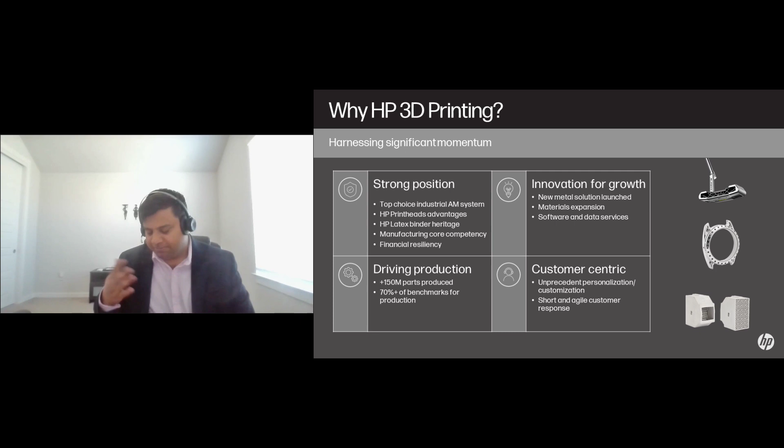Thank you, Sharon. Thank you all for those who attend the session. Really appreciate your time and effort. It's going to be one good session for who wants to know more about tooling from INDO-MIM and talk about real world experiences. I know you came here today to know more about molding tooling and its benefits and how binder jetting is enabling that.

But let me take a step back, and for those who are not familiar with what is binder jetting, what is HP doing here? Let me take a few minutes to go through this process, then I will hand it over to Jag, where the real stuff comes in.

So let's start today by discussing why HP is uniquely positioned in this ever-changing, dynamic 3D printing industry. Today, HP offers a top choice industrial manufacturing solutions, especially in additive, both for plastics and metals, with several key advantages to customers ranging from research, small and large manufacturers.

Our proprietary HP printheads and latex binder technologies gives us a significant edge that provides the key advantages to customers. In addition to our proprietary technology, we are backed by strong manufacturing core and finance resilience, which is very important today in the additive manufacturing industries.

Don't take our words for this, but if you look at it, how many production milestones we have achieved with our partners, our customers out in the field, we have produced over 150 million parts. Our partners have produced 150 million parts using HP's technology, which is setting a benchmark for industrial applications and scalability. We are not happy with that. We want to continue to drive our innovation, so that more and more people use additive manufacturing and see it as more than a prototyping technology.

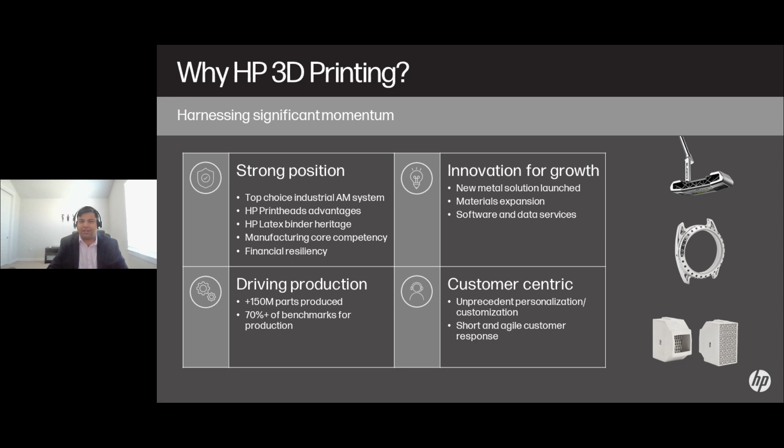With that, we launched a Metal Jet solution, which is specific for printing metal parts at scale and expanding materials both on our polymers and metal front, and advancing the software and data services to support our customers. Finally, all this is possible because of our customer-centric approach, where we listen to customers, where we deliver high levels of personalization depending on the requirements, and finally rapid response times, which are very, very essential in today's dynamic market, especially for metal binder jetting, as you can see.

So here we have our HP Metal Jet solution, which is a versatile, scalable metal 3D printing platform designed for research, small and large manufacturers use. Use the same system to develop a material, to develop the application, and you can scale it for making 1,000 parts, 10,000 parts, 20,000 parts, depending on your designs.

It includes modular components for a powder management system where you load the powder before going into printing, and you do printing, curing, and powder removal. Each of this equipment is optimized for efficiency and high quality production.

This modularity not only streamlines workflows, but also enables scalability, making it ideal for research, small and large production environments. What that means is you don't need to have 10 SKUs to address 10 different customers. You may need to have only one SKU where it meets all the customers. And as you advance in the technology, advance in the application development, you can use the same platform.

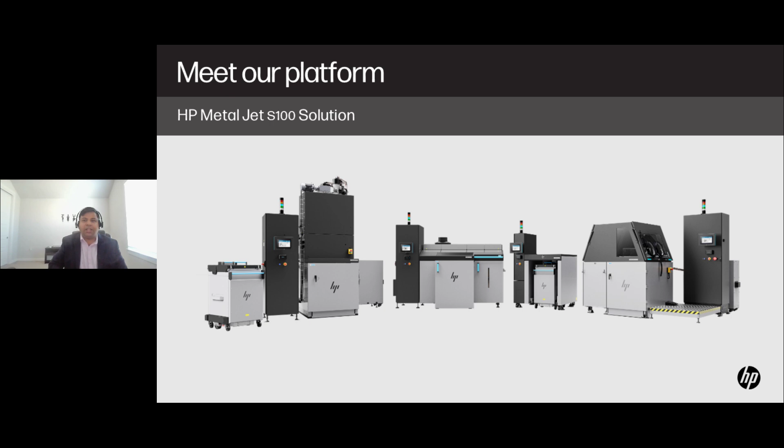HP's Metal Jet S100 delivers superior production quality and economics, overcoming traditional limitations in additive manufacturing for mass production. This is all possible because we take it very seriously, and it's very significant within HP, where we want to combine reliability, repeatability, and process economics to deliver high quality parts to our customers and install base.

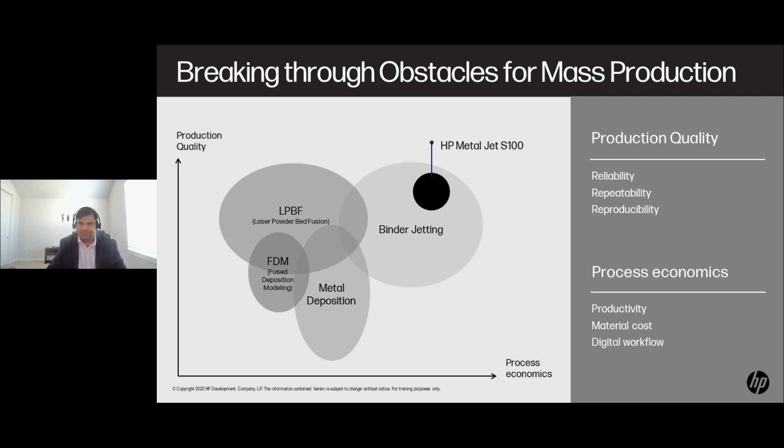In the powder management station, when you look at the screen, you find an HP Metal Jet build unit. If you're a big fan of Star Wars, think of it as an R2-D2 robot, which moves from one station or equipment to another. This build unit has 3 boxes.

The farther end box is where you put your loose metal powder, which is spherical in shape, sub 22 microns, used for building the parts. The center box is where you do the printing. You insert this build unit into the powder management station, which has an integrated sieve and automatically loads the powder into the farther boxes. Once it's done, you take it out and insert it into the printer.

In the printer, the farther end build box containing powder raises layer by layer, with each layer thickness varying from 30 microns up to 70 or even 90 microns, depending on your needs. A roller comes in and spreads a thin layer of powder. On top of it, a printhead deposits binder in selected locations—imagine it like printing on a piece of paper at home, except instead of paper, you're printing on a metal powder bed.

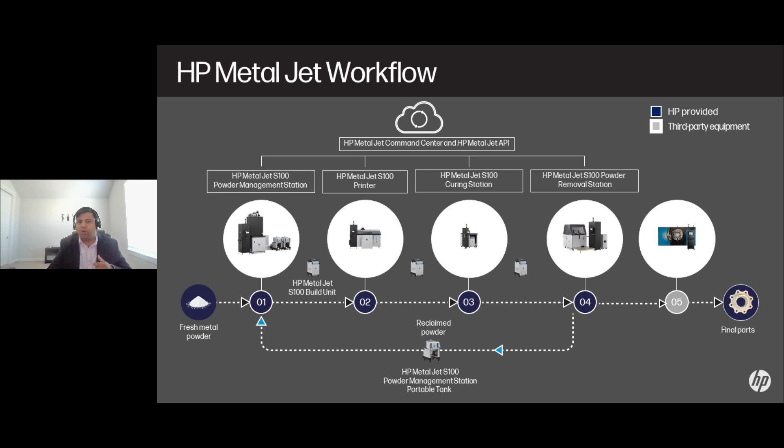This workflow ensures efficient, sustainable production, covering various types of equipment for seamless operations. Each step is designed to maximize productivity and minimize waste for an end customer, whether that's a research institution, a small manufacturer, or a large manufacturer like INDO-MIM.

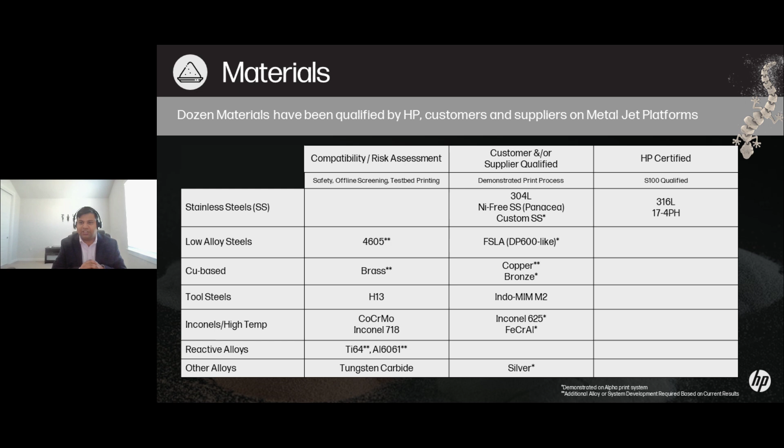Our equipment is mostly an open material system, where we support a diverse range of materials categorized into 3 steps. The farthest right is HP certified materials, meaning HP has gone through several rounds of testing and qualifying from powder lot to powder lot, printer to printer. The center section shows customer or supplier qualified materials, where INDO-MIM has qualified their M2 and 316L on our platform over the last 8 to 10 months, going through printing protocols specified by HP to demonstrate high quality standards. The farthest left column shows all materials HP has evaluated but waiting for the right customer demand and pull to move from left to right.

So finally, what makes us different? These numbers talk about operational efficiency, taken from our install base—not from HP, but from our complete install base. Operational efficiency is a priority for HP Metal Jet installations.

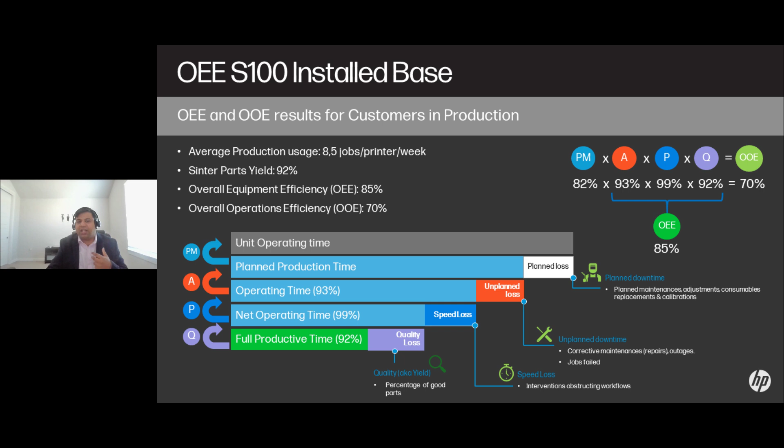Here you can see the key performance metrics: 85% overall equipment efficiency on our printers, printing on average 8.5 jobs per printer—not across all printers, per printer—with a yield of 92%. These metrics highlight what we want to deliver in the field: productivity, quality, and reliability to our customers, so they can put real application parts into production.

Finally, I'd like to take this chance to highlight our successful partnership with INDO-MIM, with 3 HP S100 solutions placed—2 in India, 1 in San Antonio, Texas, last year. INDO-MIM has been supporting multiple OEMs and qualified M2 and 316L powders for our platform, with more to follow. This partnership demonstrates how HP technologies enable large-scale production partners like INDO-MIM to support diverse manufacturing needs across different regions, and continues our collaboration in bringing out new materials and solutions to customers who haven't experienced additive manufacturing before.

With that, I would like to introduce Jag Hola from INDO-MIM, who is our continued champion and great partner. Jag.

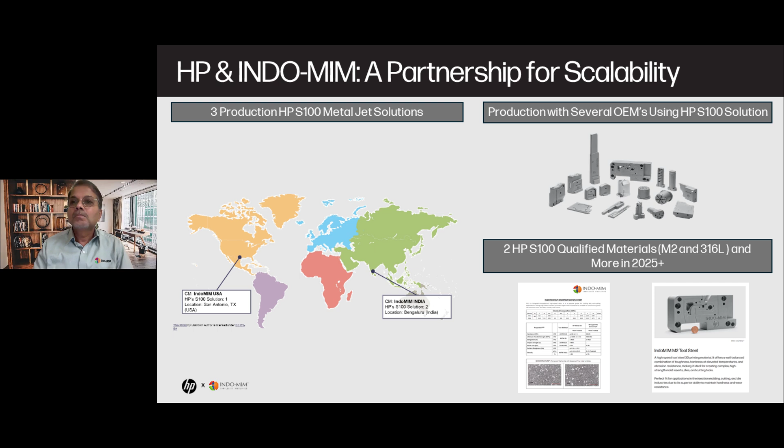Jag, I believe you're still on mute. There you go. Yeah, okay.

Good morning, good evening. Considering where you are calling from or attending the webinar, it's our pleasure today to share some of our experiences with binder jet 3D printing as applied to producing tool elements.

But before we dwell into more details, let me introduce INDO-MIM. I'm not able to move the—

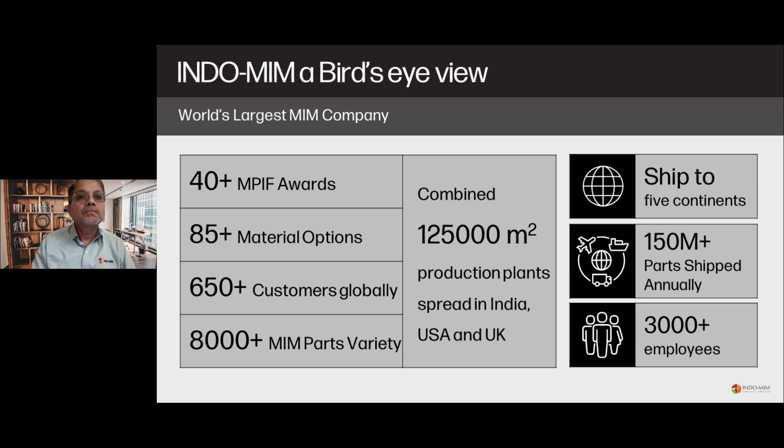Let me introduce INDO-MIM before we get into more details about the tool elements and how we adopted binder jet technology for producing the tool elements.

INDO-MIM primarily is a metal injection molding company. We are one of the largest in the world, and we have been in the MIM field for over 25 years. We ship to more than 5 continents, approximately 150 million parts per year. We have a production floor space of around 125,000 square meters. We service around 650 customers globally, and more than 8,000 MIM programs on an annual basis.

We also got involved with binder jet 3D printing since 2019, ever since the binder jet process started coming on the horizon. So we have probably accumulated one of the best experiences in binder jet technology, working with partners like HP for more than 4 to 5 years.

But what sets us apart also is we manufacture metal powder for additive manufacturing. Originally we started making these powders for our own captive requirement for the MIM process, but then we expanded our capabilities into 3 gas atomizers, where we currently produce powders for binder jet, LPBF, thermal spray, cold spray—pretty much anywhere metal powders are required, anywhere between 3 microns to 140 microns particle size distribution. We are in a position to make those powders.

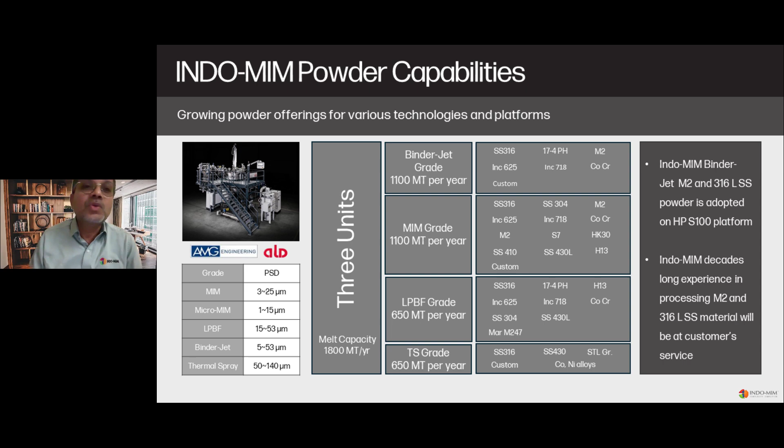Now let me also explain why we got interested in producing tool elements through 3D printing. Considering that we are a very large MIM company and service close to 10 to 12,000 MIM programs globally, and also launch around 300 new MIM programs every year, you can imagine the amount of tooling requirement that is required for running our business.

We have a very, very large tool room capable of producing close to around 900 MIM molds per year. Traditionally we have been doing production of the mold through conventional machining, which is a very acceptable process that most tool rooms in the world follow—basically machining it from bar stock. But this process definitely has got a lot of drawbacks.

As we are exposed to more and more newer technologies, we start seeing the drawbacks with the conventional method of working. The conventional production of tooling involves several machining steps, and it involves a large number of experienced tool makers that are very hard to find these days.

Conventional metal machining for producing tool elements doesn't give you a lot of design flexibility that 3D printing can give. About 10 to 12 years back, many tool rooms, including INDO-MIM, started adopting the 3D printing process. But before a couple of years back, we only had the option of printing tool elements using the LPBF process.

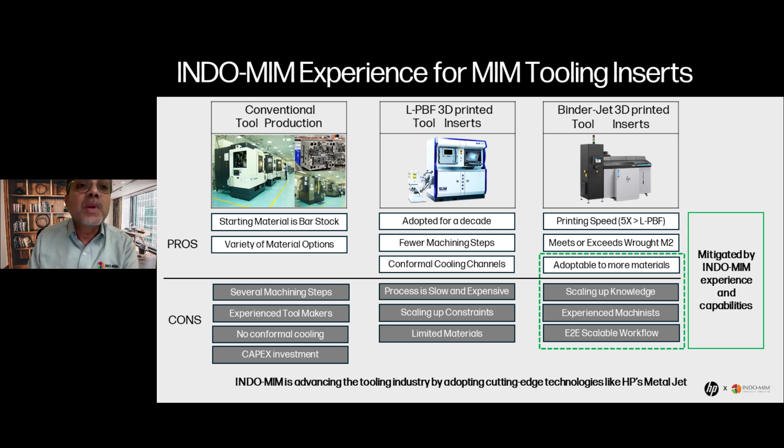That was one of the reasons why we really started putting a lot of energy into producing tool elements using binder jet for the tool elements.

Now let me quickly touch base on the benefits of binder jetting for tooling, which is very similar to all the advantages that industry has been enjoying for the last decade through laser bed fusion. So that's why I don't want to spend too much time, but we all know that binder jetting or 3D printing allows us to use conformal cooling technology, wherein you're now able to take the cooling channels very close to the molding surface, which means you're able to cool or heat the mold elements during the molding process more efficiently.

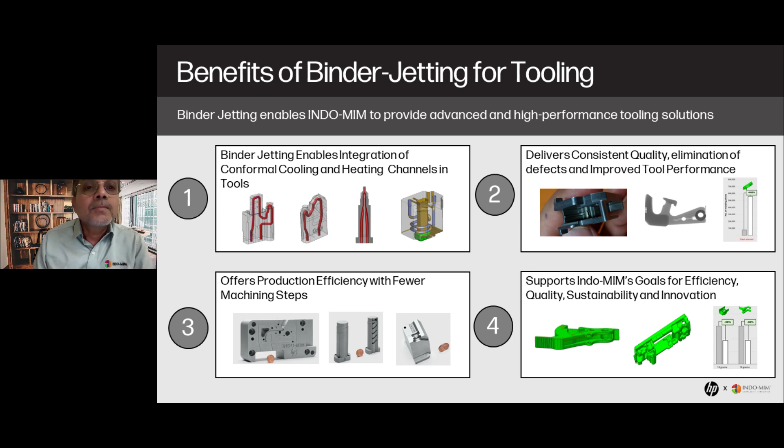These are some examples of the mold elements, just for your reference. We printed mold elements as small as 300 grams, but we also printed mold elements as heavy as 10 to 12 kilos. As you see here, some of this cavity, the mold cavity you see on the picture, they're easily around 8 to 10 kilos, which is quite surprising for the 3D printing industry, where normally LPBF, especially in the mid-level situation, you don't really print more than 4 or 5 kilos of material.

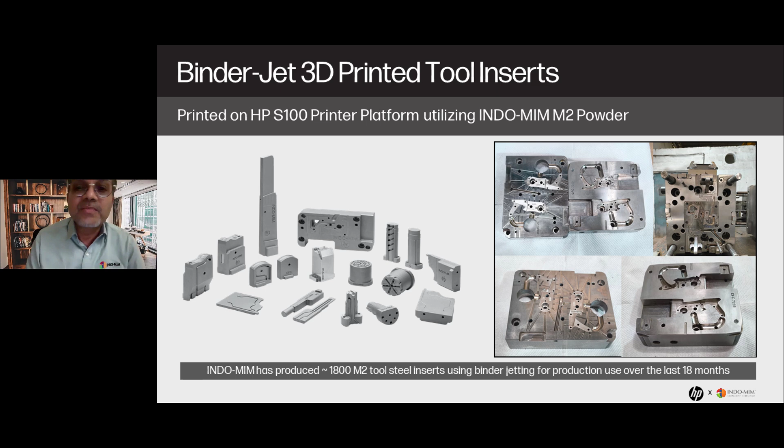Now coming to a real world example, I want to bring you up to speed on these examples taken from our operation, our tool room. How do we know that binder jet 3D printing is able to achieve the required success compared to the conventional method of manufacturing? So what we did was focus on a few key elements.

One of the key elements was, as we all know, in an injection molding process, it's important to have a uniform temperature on various elements of the mold so you can mold efficiently and cool the part efficiently. So we focused on the temperature study of various sections of the tooling on the 3D printed mold elements to see if there's any advantage. We also compared what kind of quality improvements we were able to achieve on the component using binder jet 3D printed mold elements. And obviously, we were also looking for cooling time reductions.

Are we able to reduce the cycle time from 40 seconds to 30 seconds, or 30 seconds to 25 seconds on a production basis, because now you are able to heat and cool the mold more quickly than we were doing earlier. And most importantly, we also focused on whether there is a real improvement in the mold life.

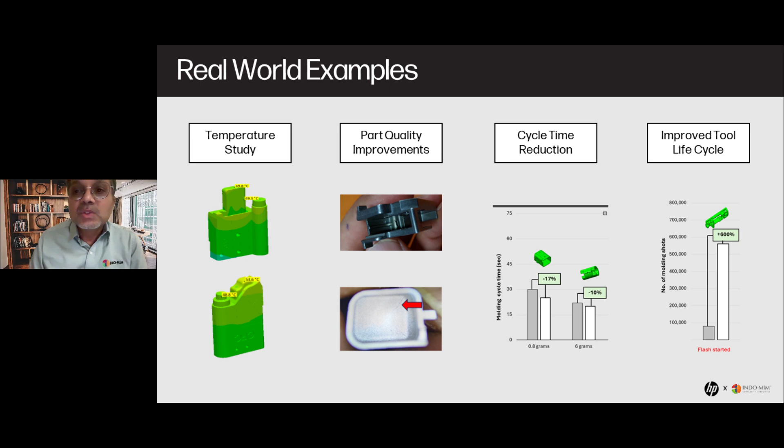When we switched over from wrought M2 to maraging steel laser bed fusion, we were very disappointed because the mold life actually dropped, as we were not able to get the required hardness on the laser bed printed tool elements. Now we are able to do M2 material with 63 to 66 HRC hardness, so we are hopeful we will get a very big improvement in tool life. So we focused on that as well, and I'm about to present some of those findings for your reference.

Starting with conformal cooling, how it really helped us maintain uniform temperature across the mold element, which helps both in cooling the component uniformly and molding it so the material does not freeze unduly in certain areas. If you look at the tool element, the conventional tool design only allowed a straight line, so the cooling was very inefficient. Because we adopted 3D printing, the conformal cooling tool design allowed us to take the cooling channel as close as possible to the molding surface.

The initial temperature, before we started molding, was obviously similar across all mold elements. But when we run 15, 20, 30 cycles, for lack of appropriate cooling, certain elements on the tool become significantly hotter than others, and that actually caused a lot of quality issues in the process.

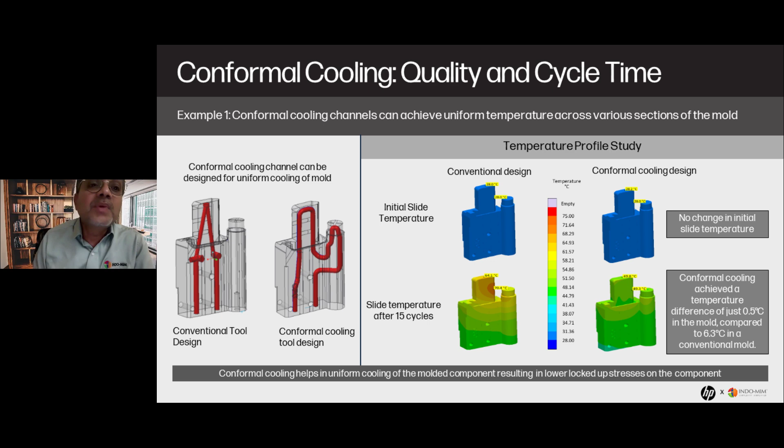By adopting the conformal cooling tool design, the temperature difference between the various tool elements dropped to only 0.5 degrees Celsius, compared to 6.3 degrees Celsius on a conventional mold. That was a huge advantage for us, which we were not able to achieve with conventional tool design and manufacturing.

Here is another example, where we were able to drop the temperature difference to only 4.8 degrees Celsius compared to 14.1 degrees Celsius with a conventional method. These things really went a long way in helping us improve the molding quality and the quality of the product.

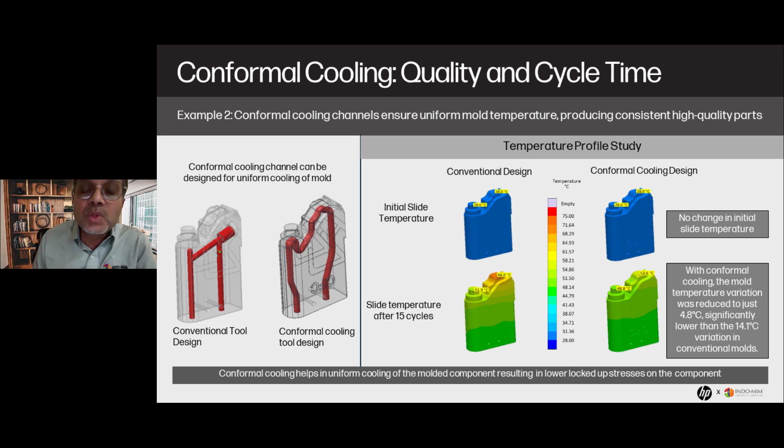Same thing here, if you look at this component, we struggled a lot with the conventional method of producing the tool because we were not able to cool or heat the mold adequately or uniformly. We always struggled with a void in the middle of the component, as you can see on the X-ray, a void we could never get rid of, which was not good for the strength of the component.

So when we switched over to a conformal cool design, to our surprise, that void actually vanished completely, and we were able to produce quality product without having to worry about the integrity of the component.

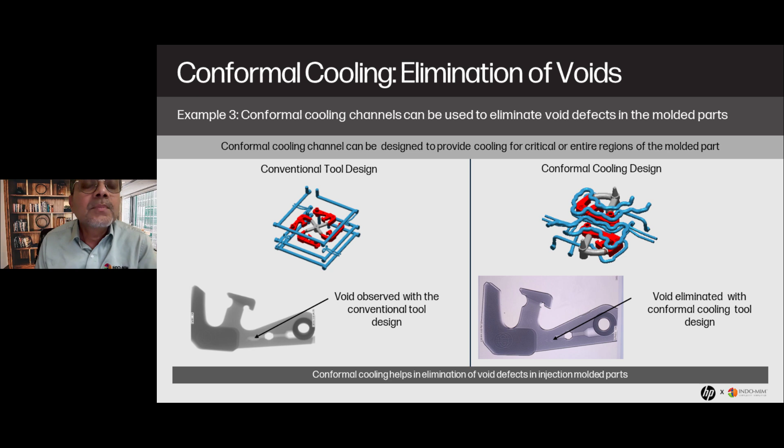The same thing applied to the elimination of the sink defect. As we all know, if the component has a lot of hot spots when you are molding, that results in a sink, and eventually a void created because of the sink. Those kinds of defects we were able to completely eliminate.

If you see here, on the conventional slide you were only able to drill straight holes, but on a conformal cooled slide that was 3D printed using the binder jet process, we were able to take the cooling channel all the way to the surface of the molding. The kind of sink we used to see all the time, by changing the mold design and method of manufacturing, we were able to completely eliminate on the component.

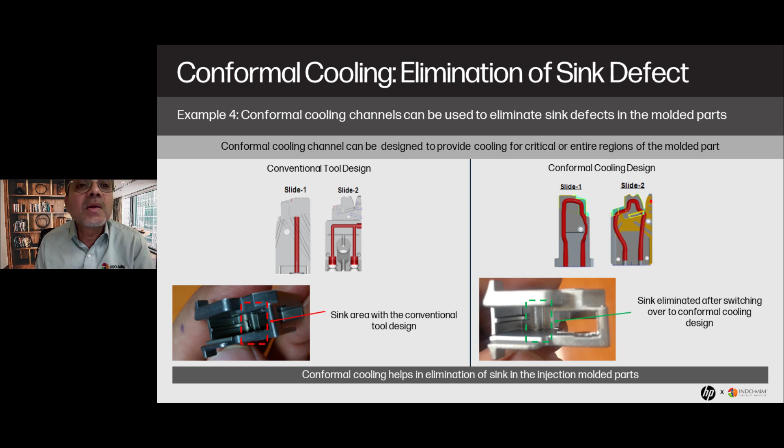The same thing here, if you look at this component, because of uneven cooling, the conventional tool design only has straight lines, which was not sufficient for uniform cooling in the slot area. On a 3D printed tool design, you were able to get a conformal cooling channel much closer to the area where the cooling is required.

So we were able to significantly reduce the distortion in the slot, considering that we were doing 100% inspection, sorting out and losing 10-20% of the component. We were able to get 100% yield, and we eliminated even inspection, because we were so confident about the process with the new design.

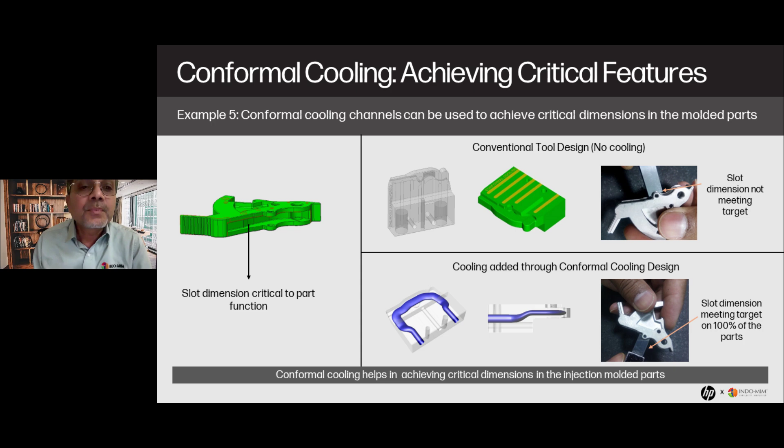A similar case study here: the slot at the back end was always an issue, and we were able to resolve that issue with 3D printed conformal cooled inserts.

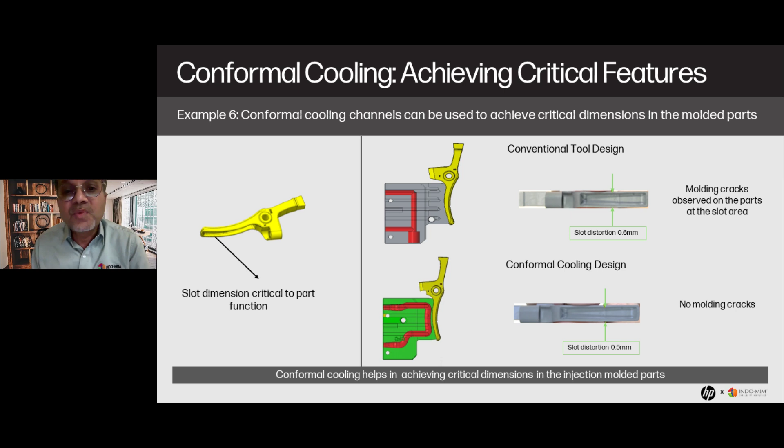That was all about the cooling, but we also noticed that this conformal cooling can also be reversed into a conformal heating. If you look at this component, this is a very small component with a very thin wall, and we always struggle to fill the material, because metal injection molding is not like plastic. We are trying to injection mold a semi-solid material.

So as the wall thickness reduces, the material loses its heat very rapidly. So it's important that, until the last fill point, the mold remains at a particular temperature, and that is only possible if you are able to heat the mold uniformly during the filling cycle.

So in the conventional design, we only had a straight line, and we really struggled with filling this component. But when we redesigned the part with conformal heating, we were able to pass the heating liquid into the cavity and keep the mold at a required uniform temperature, so that we were able to fill very effortlessly.

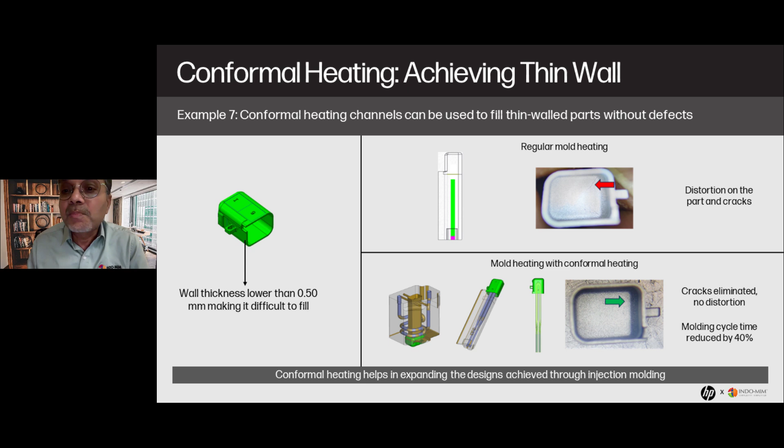And because of that, the cracks and other issues that we used to see in the component completely vanished when we actually used the conformal cooled inserts.

Now, coming to the cycle time reduction, because we were able to quickly cool the components after the molding is over, we always anticipated that the cycle time would probably reduce somewhat. But we were surprised that we were able to pretty much achieve anywhere between 10% to 40% lower cycle time on the molding cycles, across the board.

The minimum we were able to see was around 10%, but in some places we have seen 40 to 50% cycle time reduction. Now, when you are running programs with hundreds of thousands of parts per week or per month, every second that you save on the cycle time goes a long way in terms of cost reduction.

So you don't have to add more molding machines. Your overall cycle time and overall productivity of the shop floor will significantly improve.

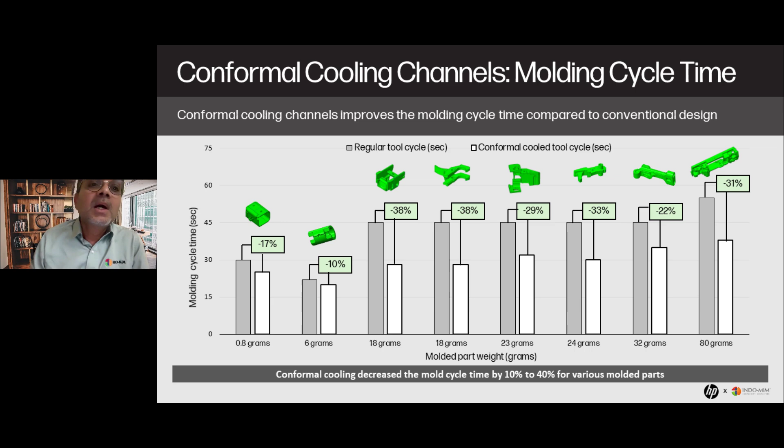And for us, the biggest surprise also was the mold life improvement. We thought there could be probably a 20-30% improvement in the mold life. And that was a huge requirement for us, because when you are running 1,200 molds in a year, and then you produce 900 molds and support 12,000 programs, there is always a requirement of replacement molds.

The way we calculated the mold life was between starting off using the mold to the time where it starts flashing first, how many cycles the mold is able to run. Because each flash correction is a burden on the tool. The tool is pulled out and it goes to the tool room.

You spend a lot of resources. To that extent, you don't have the mold in production. So it is really a pain point for us. We were able to see on the first tool that actually completed its life, we were able to achieve almost 600% improvement in the mold life.

There are a lot of other molds that are currently running in production. Pretty much all of them are still running, and we are already seeing anywhere between 15% to 215%. And these molds are actually still running. So by the time they are done, we are hopeful that on average we will be able to see anywhere between 200 to 300% improvement in the mold life, which is a huge deal if you are running a tool-dependent technology for day-to-day business.

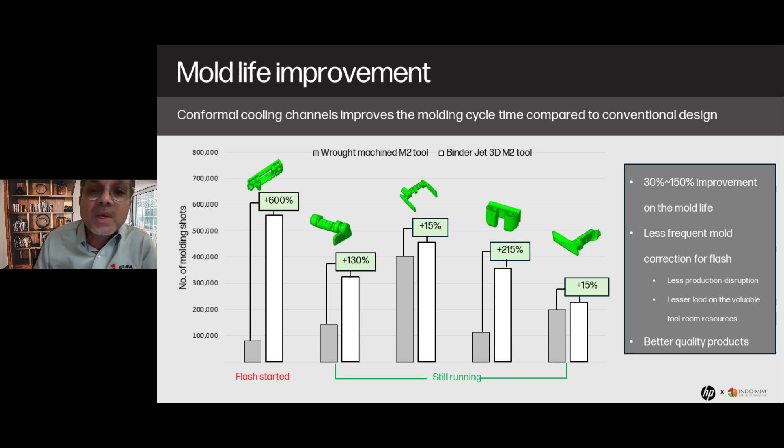So coming to how we are able to achieve these things. Of course, people have always used wrought M2 material for producing the tool. What they are not able to achieve, how binder jet material is able to achieve, initially we were also a little surprised. But when you metallurgically analyze and compare the microstructure, it becomes very clear why a 3D printed binder jet tool element behaves that way.

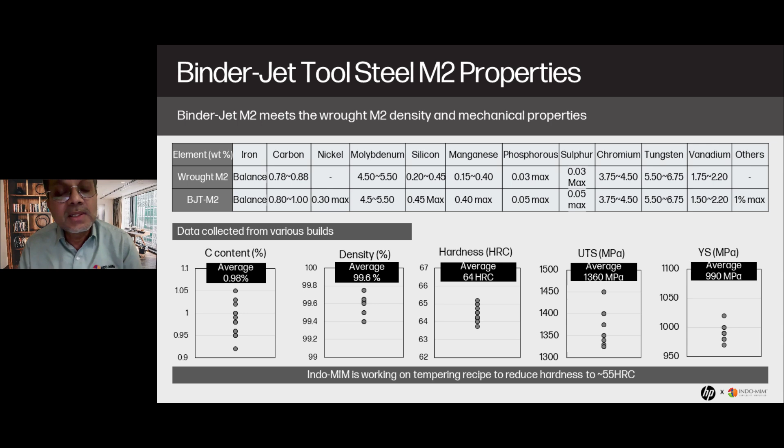It's able to offer you 200 to 300% improvement in mold life. Now, we really didn't do much change on the chemistry part of it. The chemistry is pretty much comparable with the wrought material, and similarly the material properties - yield strength, UTS, hardness, density, etc. - are all very much in line with the wrought material.

But in addition to the tool life study, we also did some fundamental R&D work trying to one-to-one compare the machinability of the 3D printed M2 material. For lack of any organized method to understand the machinability difference between wrought and binder jet material, we just took a big block and started drilling a 4 millimeter hole until the drill bit no longer produces a good quality hole.

To our surprise, the wrought material produced only 28 holes at 64 HRC hardness, whereas the binder jet material, we were able to take it all the way up to 46 holes without damaging or getting into poor quality of the hole.

Same way, we also conducted lab level wear resistance testing. How come we are able to see 200% minimum improvement in mold life? There has to be something to do with the material wear resistance. So what we did was conduct a lab level wear resistance test.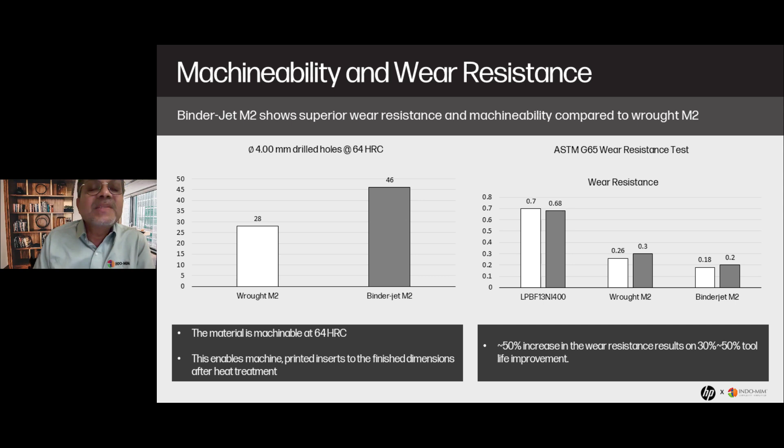And we all know, finer the microstructure, better is the wear resistance, better is the machinability, better is the life of the material you produce with it. So finally we got a full round answer why M2 material produced through the binder jet process not only gives you 360-degree freedom in your design and allows conformal cooling, which was never heard of in a conventional tool room, but the material, the process, all of them come together, including productivity, which is probably around 5 times faster than conventional 3D printing using laser powder bed fusion.

I think we have really hit a sweet spot with a combination of all these technologies coming together. So with that, I will end my discussion today on our experiences with binder jet 3D printing and the properties of the material. Now we are open for questions if you have any. Thank you very much.

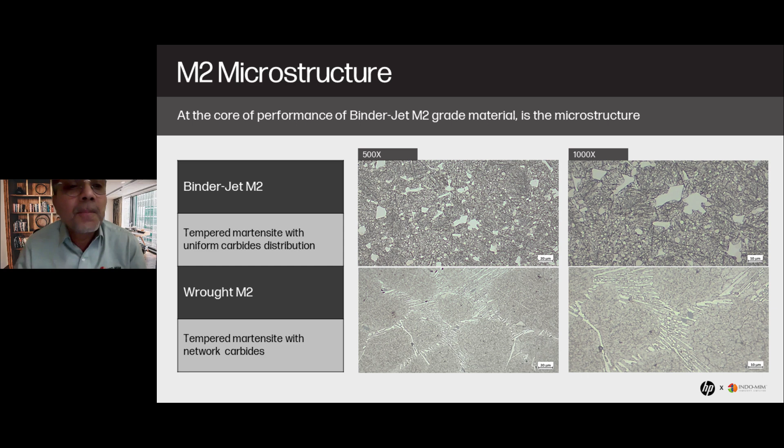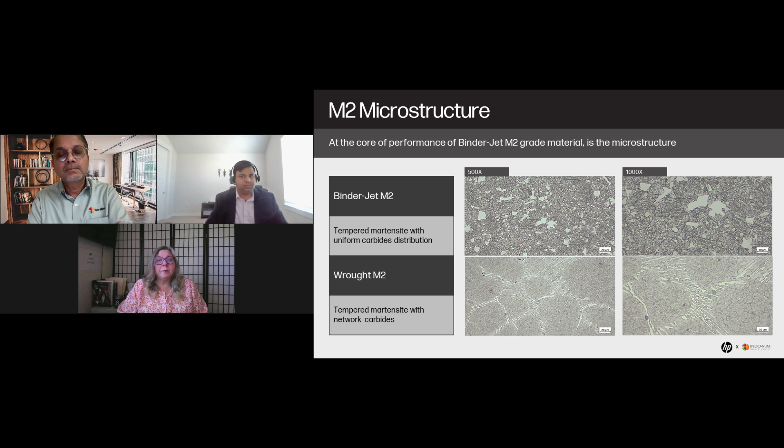Our first question is, how do you manage warpage of the mold insert during the sintering? Are there any preliminary simulation steps?

We do, of course, use some simulation steps, and there is also a software that HP supports with as well, to understand the sintering distortion ahead of, before even you start sintering. To that extent, we try to add the compensation. The beauty of 3D printing is it's not a tool dependent technology, so you can always add material where you think it is distorting in the reverse direction, so that the distortion actually brings it back to the required shape.

Having said that, the tool elements themselves are pretty robust in design - they have decent wall thickness, no overhanging walls and things like that. So the application itself is not really prone to a lot of sintering distortion. But to answer that question, yes, we do use simulation, and HP has a product that comes with the printer. We have also used our sintering knowledge - 15 to 20 years worth of knowledge that we have in sintering the M2 material.

I would like to add one point to that. What we have seen with the INDO-MIM M2 powder, we haven't seen significant warpage in the tools. They're almost as flat as possible. So it can be a combination of technology and the powder, how it's working. Correct me if I'm wrong, Jack. Yeah, right.